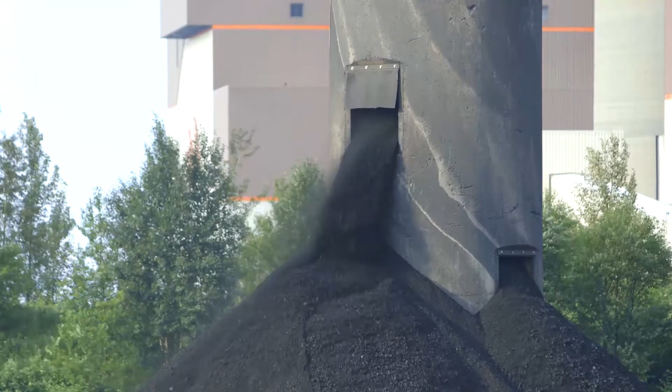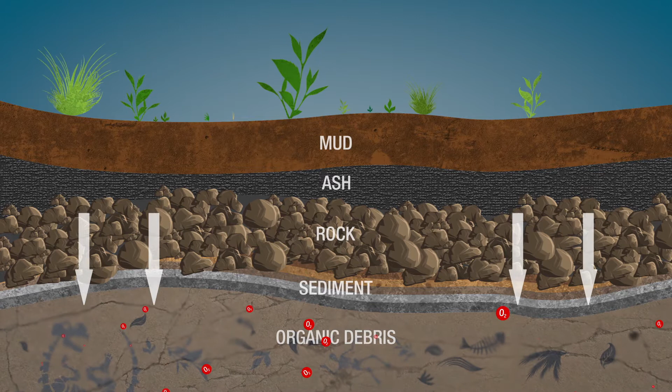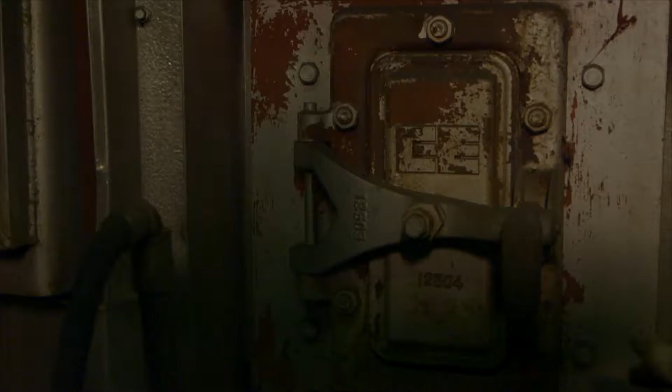Coal. Over millions of years, terrestrial and marine plants and animals become buried under sediment, rock, ash, and mud. Heat, a lack of oxygen, and tremendous pressure combine to chemically change the carbon-rich organic matter into a mixture of compounds we call fossil fuels. Coal is the most plentiful of fossil fuels on the planet. Like petroleum and natural gas, coal releases tremendous amounts of heat when burned.

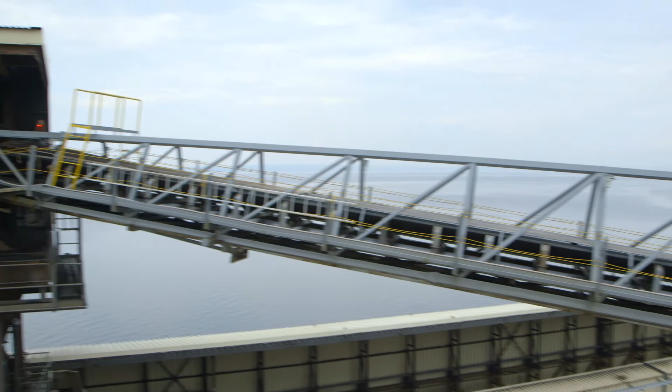If energy was the only consideration, fossil fuels would be a nearly ideal energy source. They are transportable, storable, and energy-dense. Almost all aspects of human society are now tied to the use of fossil fuels in some way, including electrical generation. 22% of all electricity in Canada and almost 70% of the electricity used in the United States is generated by burning fossil fuels.

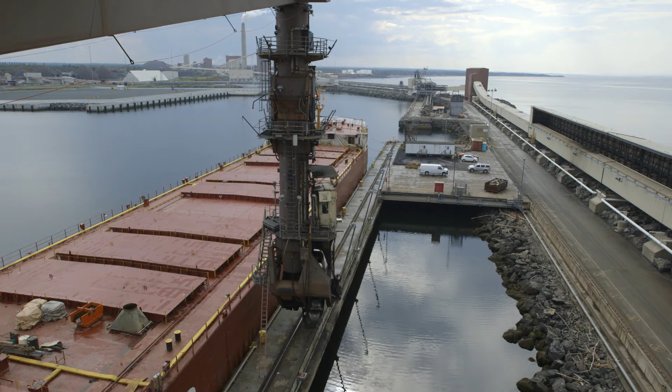Here in New Brunswick, the Belledune coal-fired thermal generating station above Bathurst, with a capacity of 490 megawatts, accounts for around 20% of the province's electricity. The plant is now a little over 20 years old and is run by a staff of 50.

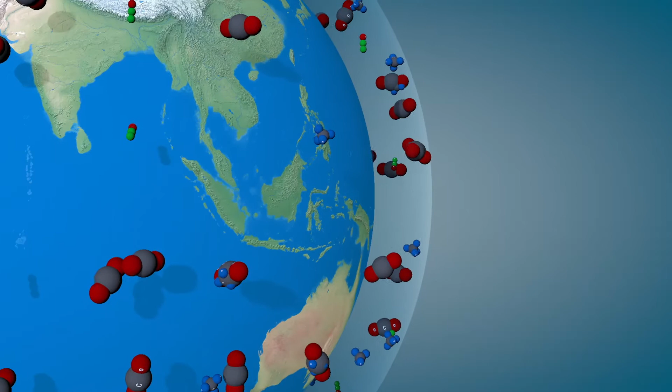Coal has two serious disadvantages shared by other fossil fuels. First, it is a non-renewable resource. Although there are ample coal supplies presently, these are diminishing. Second, and most sobering, is the recognition that the burning of all fossil fuels releases toxins and greenhouse gases into the environment. Greenhouse gases contribute directly to climate change through the greenhouse effect by trapping heat inside the atmosphere. The mining of coal also has negative consequences on the environment and human health.

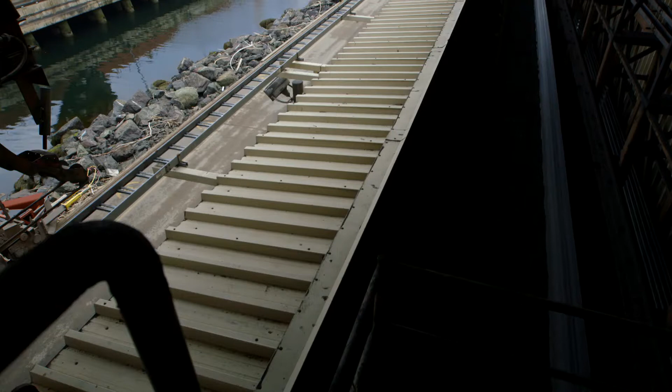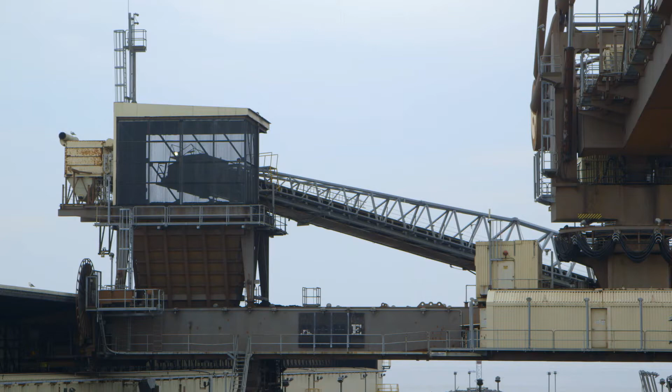There is no easy solution, yet. Let's look at the pros and cons of coal and see how utilities are working to maximize its benefits and minimize its harmful effects. Coal is brought to Belledune's port on the Bay of Chaleur by cargo ship from around the world. This ship unloads the coal by conveyor belt. For other ships, the Continuous Ship Unloader, or CSU, is used to unload more than 2 million kilograms of coal every hour.

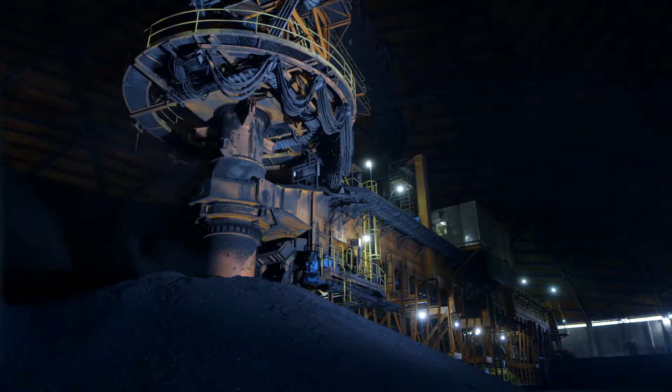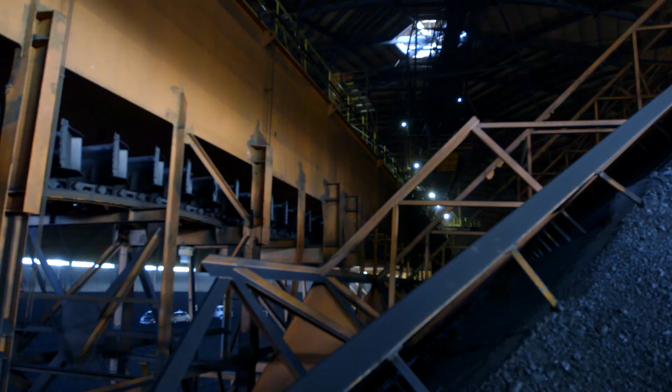The coal goes on a system of conveyor belts that are over 3 kilometers in length. The conveyor belts move the coal to storage facilities until it is needed in the plant. Several different grades of coal are delivered to Belledune. These different coals are combined for their chemical properties to produce the best heat at a reasonable price. High-grade coal comes from Colombia and is stored in the huge coal house. The coal house can hold 120,000 tons of coal, or enough to run the generating station for 30 days.

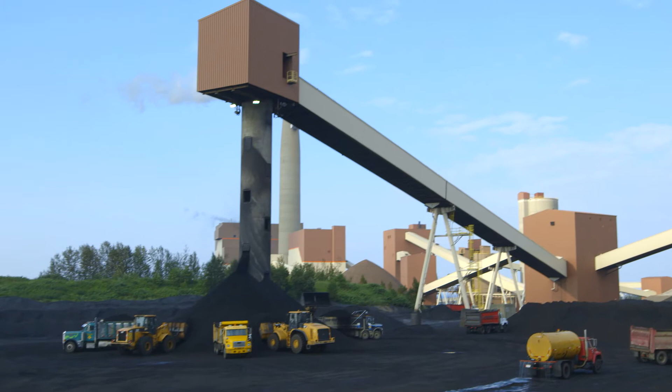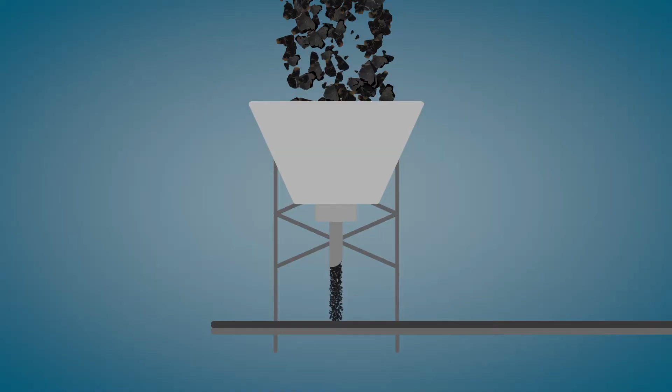10 times that amount of cheaper, lower-grade coal from the western U.S. can be stored in the coal yard. Petroleum coke, a byproduct from refining oil, comes from the Great Lakes region and is stored in the coal yard. Belledune coal first needs to be crushed into a fine dust before it can be burned. This job is done by 5 separate pulverizers.

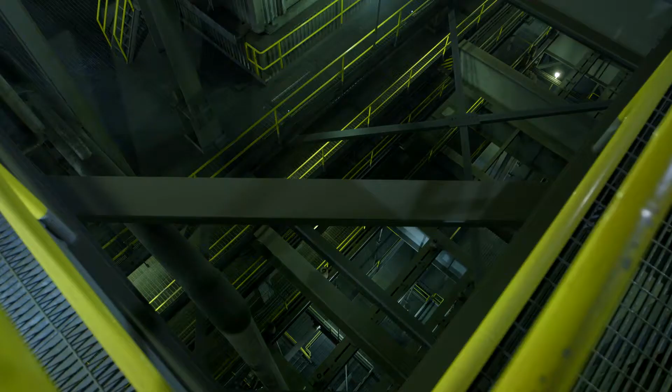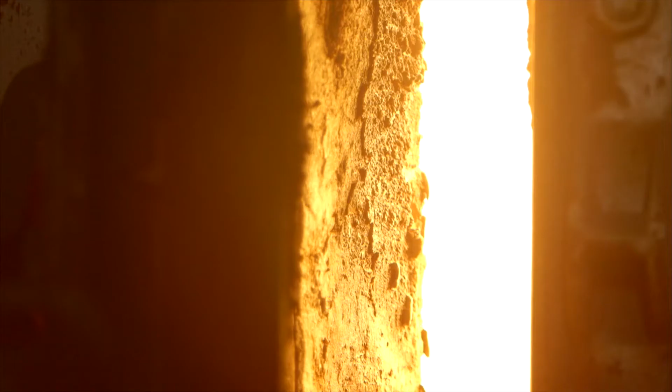The fine coal dust now makes its way to the boiler, which is the heart of every thermal plant. The boiler is a 12-story tall furnace suspended from the roof. The crushed coal dust is mixed with air and injected into the boiler, where it burns to produce air temperatures of over 2,000 degrees Celsius. That's easily hot enough to melt iron.

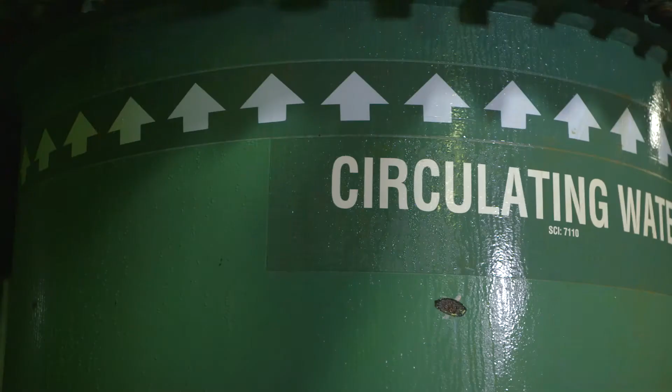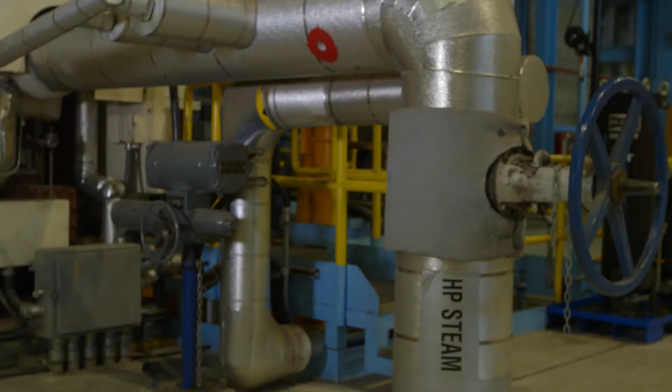Now to make steam. Water that is superheated has to be very pure, or it will quickly corrode the pipes of this closed-loop system. Fresh water is demineralized and purified right in the Belledune facility. Then it is piped under pressure through the intense heat of the boiler. The result is high-pressure steam at 540 degrees Celsius. The energy from coal is now energy in pressurized steam.

This next part should look familiar. The high-pressure steam is forced through the turbine blades, causing them to rotate and spin the generator at 3,600 RPM. The Belledune thermal plant has produced electricity.

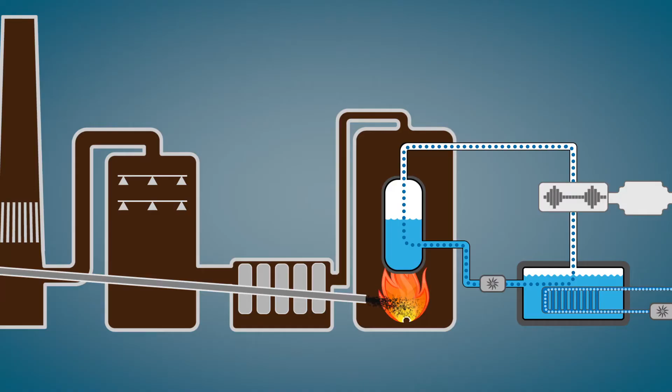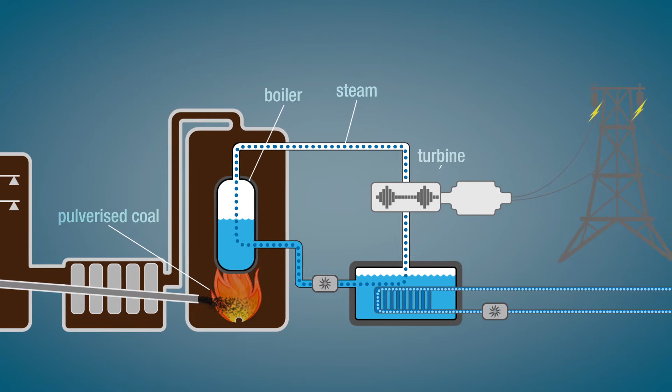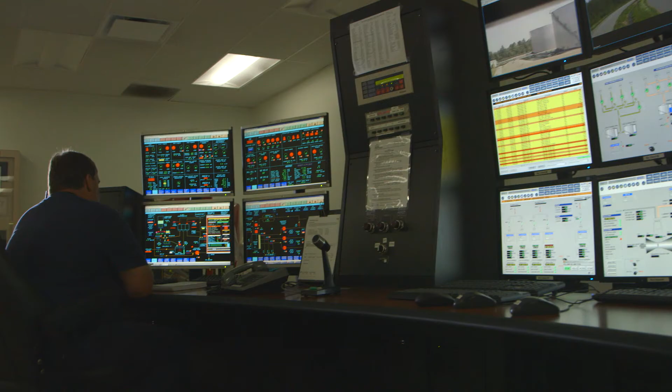All thermal generating stations, like Belledune, deal with the transfer of energy. The thermal energy from burning coal is turned into mechanical energy or work by heating water to steam and using the pressure of the steam to spin the turbine. The generator transfers the mechanical energy to electrical energy. Largely due to heat loss, this process is about 33% efficient. That means that only about 33% of the energy in the coal is converted directly into electricity.

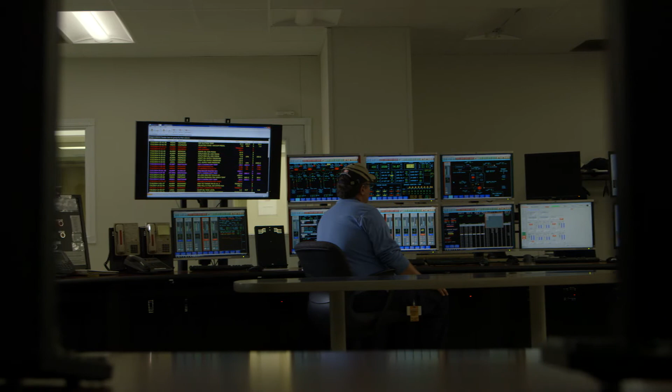Throughout the day, Belledune receives instructions from the system operator as to how much electricity to produce. The demand for electricity will vary according to the time of year, the time of day, the weather forecast, and how much power is being generated at other stations throughout New Brunswick. Belledune operates at 80% capacity on average annually, with some in reserve for special needs.

This steady supply makes Belledune a baseload station. It is very reliable during New Brunswick's cold winters and as a supplier to heavy industry. Belledune can go from minimum running capacity to full capacity in about 2 hours.

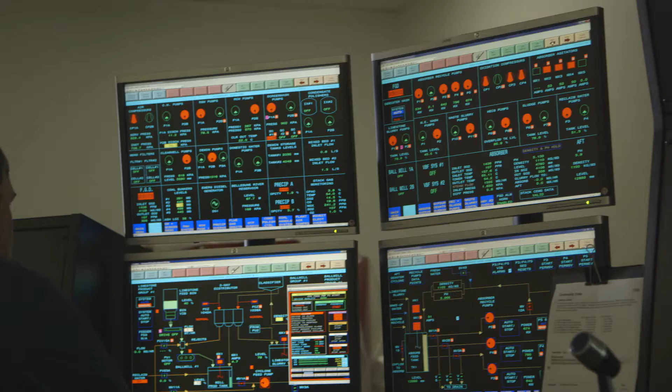There are other fossil fuel plants in New Brunswick which are designed to meet rapid spikes in power demand. They're called peaking stations. A typical demand peak occurs on especially cold winter days when extra heat is needed. Few other fuel sources can respond so quickly and predictably as fossil fuels.

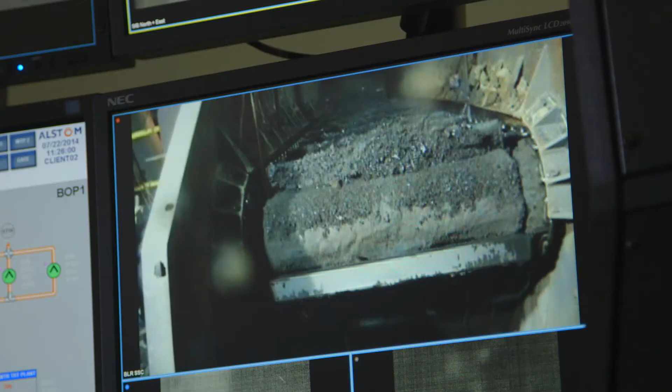Let's examine the technology used to lower waste and increase efficiency. After the steam passes through the turbine, it needs to be cooled back down to a liquid state. This happens in the condenser, where the steam pipes pass through cold ocean water. Belledune draws over 10,000 liters of cold water every second from the Bay of Chaleur to perform this heat transfer.

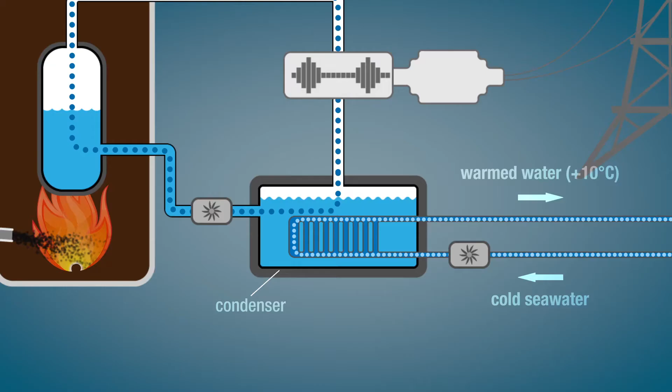The greater the cooling, the more efficiently the entire system works. This warms the seawater by about 10 degrees Celsius before it is sent back out into the bay. The flue gas leaving the boiler is still very hot. Rather than waste this energy, the residual heat is used in many ways throughout the plant, from pre-warming air to reducing nitrogen oxide emissions. This is a cost saving and helps increase the station's efficiency.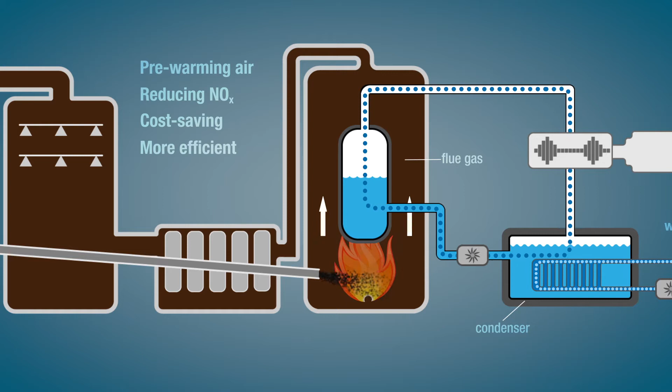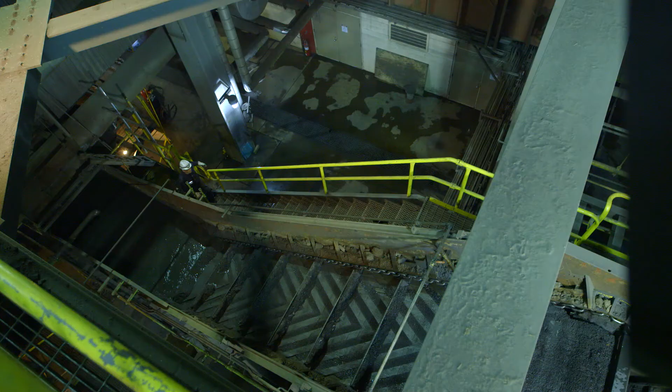What about reducing emissions? When coal is burned, it reacts with elements in the air and creates flue gas. Flue gas contains oxygen, nitrogen, and a lot of moisture, but also carbon dioxide, ash, and trace minerals. This needs to be cleaned up before it is released into the air. The first step in purifying flue gas involves removing the particles of ash. There is a fine dust called fly ash and a coarse dust called bottom ash.

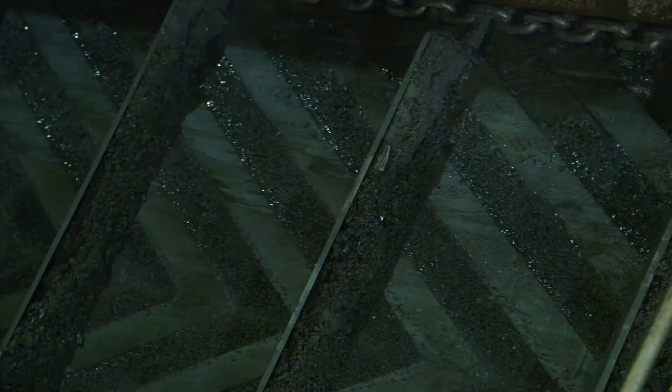Because bottom ash is heavy, it falls to the bottom of the boiler. It is removed by conveyor belt and trucked to the landfill. Belledune produces 35,000 tons of bottom ash annually. That's as much weight as 100 Boeing 747s. Fly ash is removed from flue gas in a device called the electrostatic precipitator.

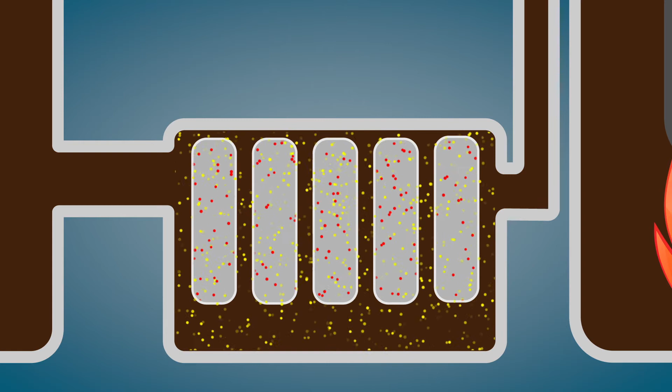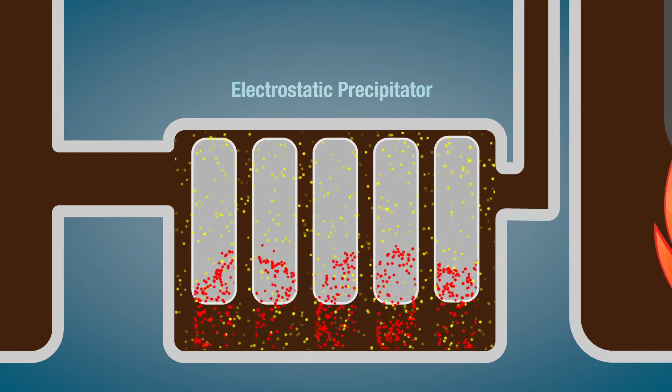Fly ash particles are electrically charged and stick to metal plates, just like static electricity makes your hair stand up straight. From there, it can be knocked loose and collected. Fly ash is an important component in the making of Portland cement. Over 99% of the fly ash is collected in this way and sold. It is not released into the air or sent to a landfill. And the recycled ash reduces the need for new raw materials that would have to be mined from the earth. That accounts for the ash.

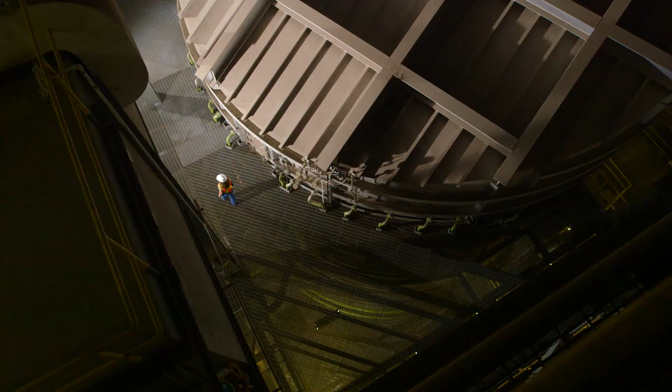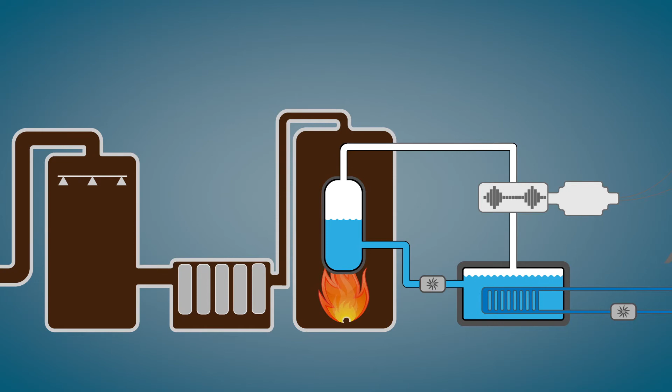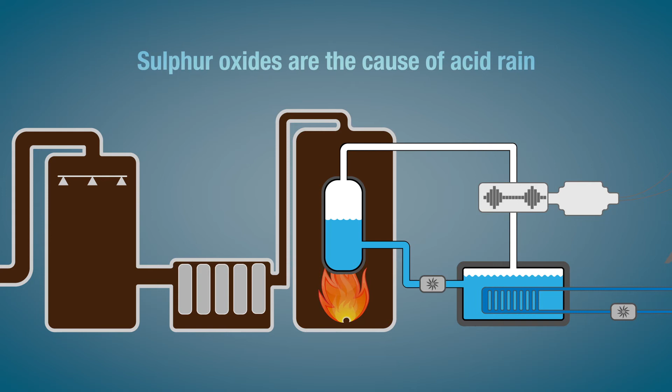Now flue gas moves to the FGD, or flue gas desulfurization unit. Coal contains small amounts of sulfur. Cheap, low-grade coal has more sulfur than expensive, high-grade coal. When coal is burned in the boiler, the sulfur combines with oxygen to form sulfur oxides. Sulfur oxides are the cause of acid rain. Since 1993, the law requires that generating stations remove 90% of the sulfur oxides from flue gas. This is done with the help of limestone.

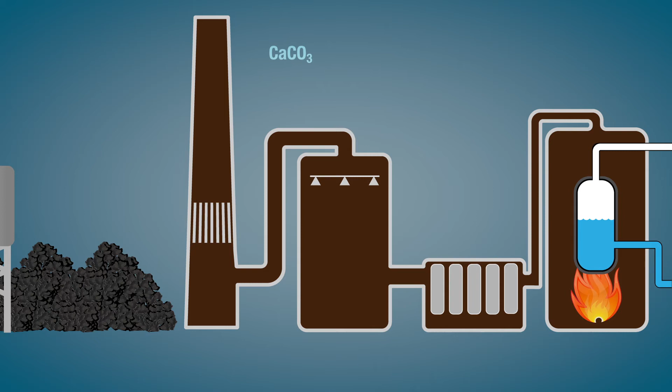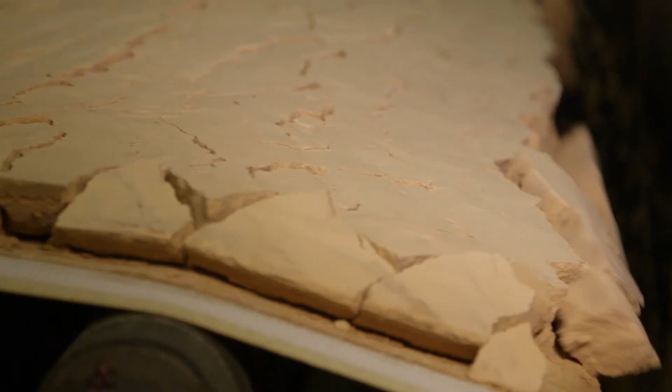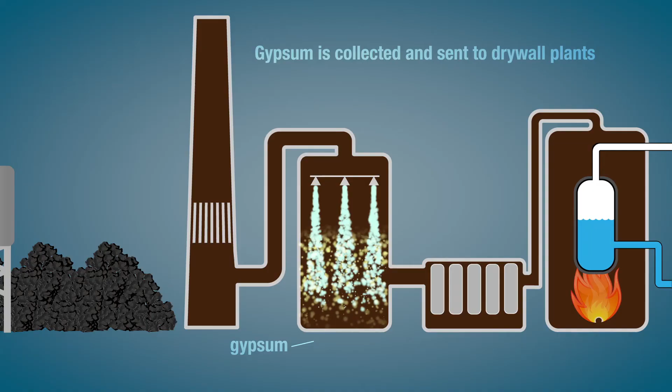Limestone is ground into a powder and mixed with water to create what is called slurry. As the flue gas rises up the FGD, slurry is sprayed down from the top. Limestone in the slurry chemically reacts with the sulfur oxides in the flue gas, producing gypsum, the major component of gyprock or drywall board used in home construction. The gypsum is collected and is sent by train to centers like Montreal to drywall plants. Belledune was the first electrical generating plant in Canada to install an FGD unit.

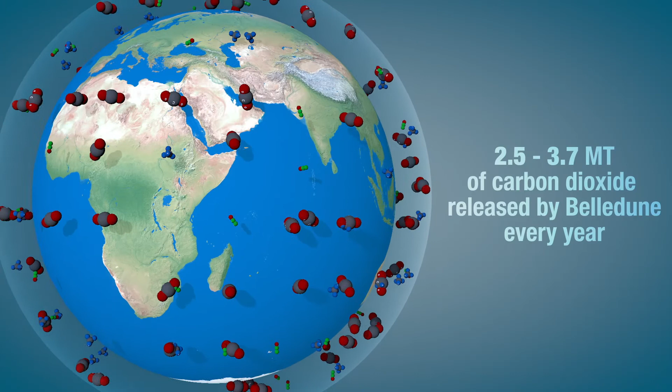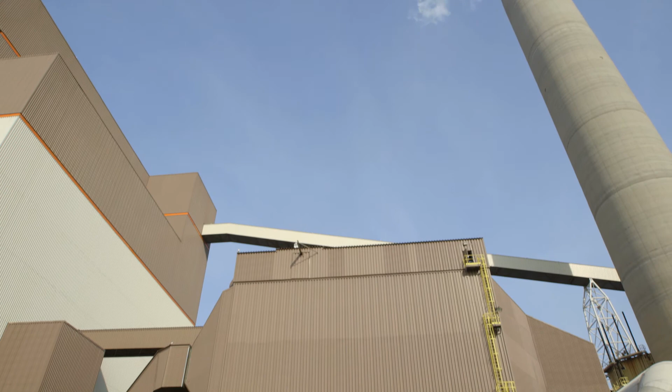At this point, the flue gas is mostly oxygen, nitrogen, carbon dioxide, and water vapor. Oxygen and nitrogen are harmless gases, but carbon dioxide is a greenhouse gas responsible for global warming. Between 2.5 and 3.7 megatons of carbon dioxide are released by Belledune Generating Station every year. That's about the same amount of carbon dioxide emitted in a year by 600,000 cars. At this time, there is no economically feasible way to remove the carbon dioxide from the flue gas, and it is not required by law. Carbon capture technology is still developing.

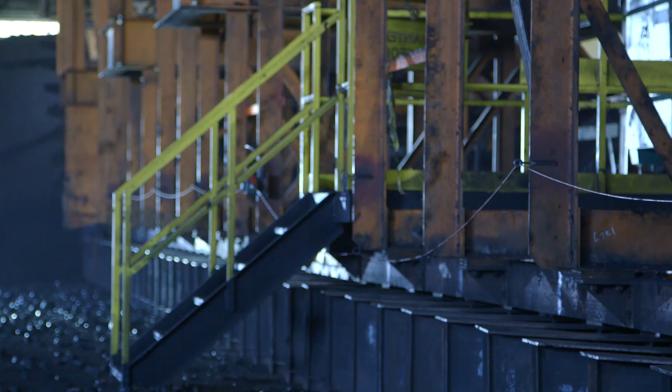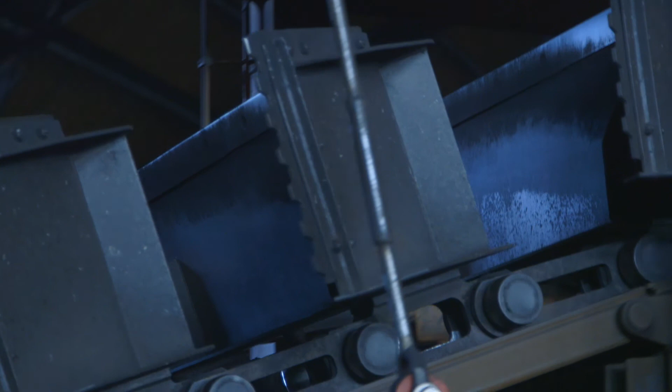The flue gas is released into the air by passing it through a 168-meter tall stack. The white plume coming out of the stack is actually just water vapor. The other gases are invisible. Coal is an important source of electrical generation for New Brunswick. It is reliable, inexpensive, and can respond to changes in demand. More coal can be burned if demand increases. Technologies have developed to increase efficiency and reduce the release of pollutants into the environment.

But perhaps the biggest environmental challenge that faces the planet today is global warming and climate change. Carbon dioxide is a chief contributor to the problem. Now that you've seen how a coal-fired generating station works, how do you think New Brunswick can overcome this seeming impasse?